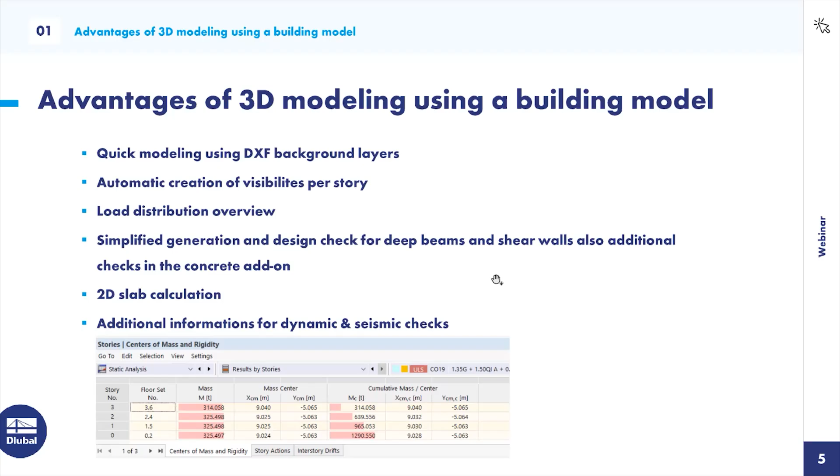Okay, let's switch to the next chapter. Here's a little overview comparing this with positional structural analysis.

The pros of positional structural analysis are, of course, that you can model this very fast and also do the design checks, and you only have two degrees of freedom in this 2D calculation. So you don't have to consider so many effects. It's very simple, and you can check it easily.

The cons are when you design a slab or a story, you calculate this, then you must make a load transfer from the story to the walls, to the columns, and from there again to the slab below. So you must transfer loads again and again until you reach the ground floor, and there you can make failures very easily when you forget some loads. We also have the option to do this with RFEM 6, and I will show you that, but you shouldn't forget something.

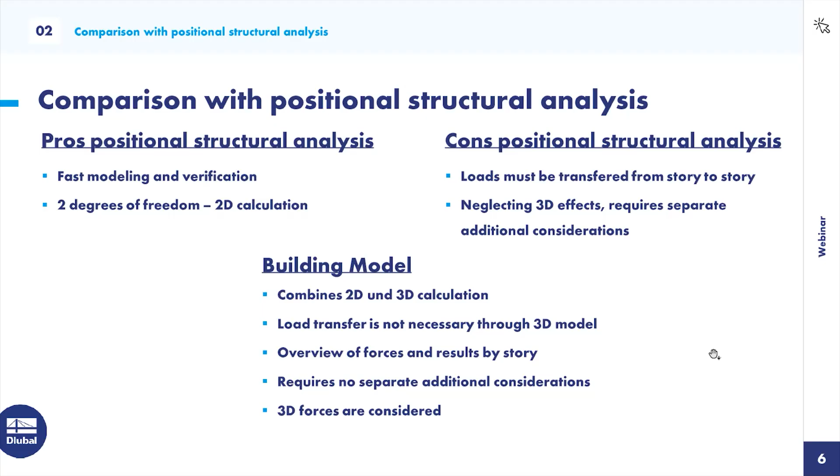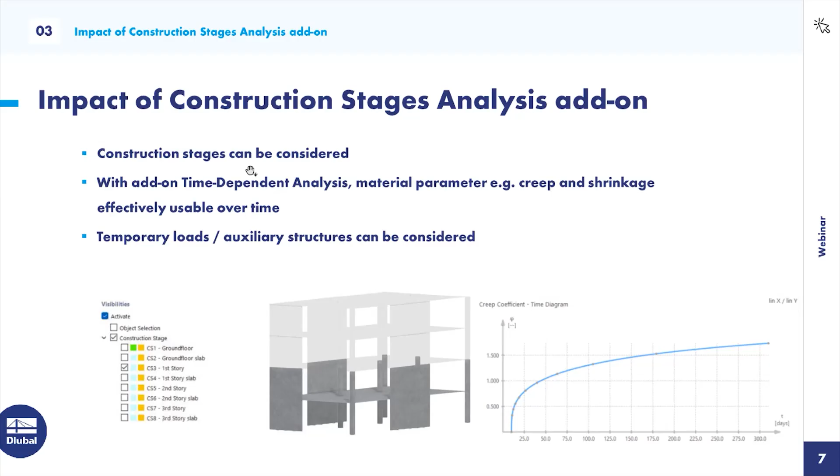Okay, that should be my overview of what I wanted to show you today. Now let's switch to RFEM 6.

Therefore, I will create a new model, and let's call it 'building model,' in 3D type of model, of course. Here are the add-ons we need. At the end, I will show you the construction stage analysis and the time-dependent analysis, but for the first step, I only activate the building model add-on and our concrete design.

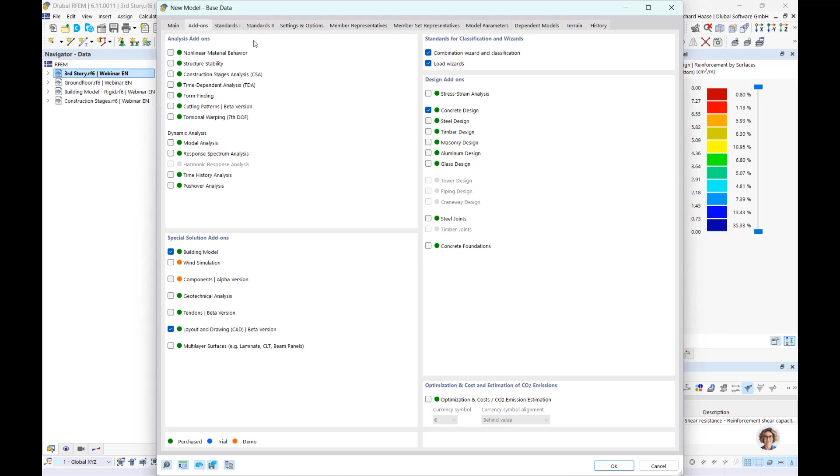Here in the standards, I choose today a German example. So let's choose the national annexes here.

And what I also want to show you is we have load wizards for wind and for snow, and a nice connection we have, I want to show over the model parameters. So if you know, we have our Geo-Zone tool where you can see the forces from seismic, from snow, or from wind, and we have a connection in RFEM 6 directly when you click on this button. In the background, it opens our Geo-Zone tool. Here you see our information about snow, wind, and seismic.

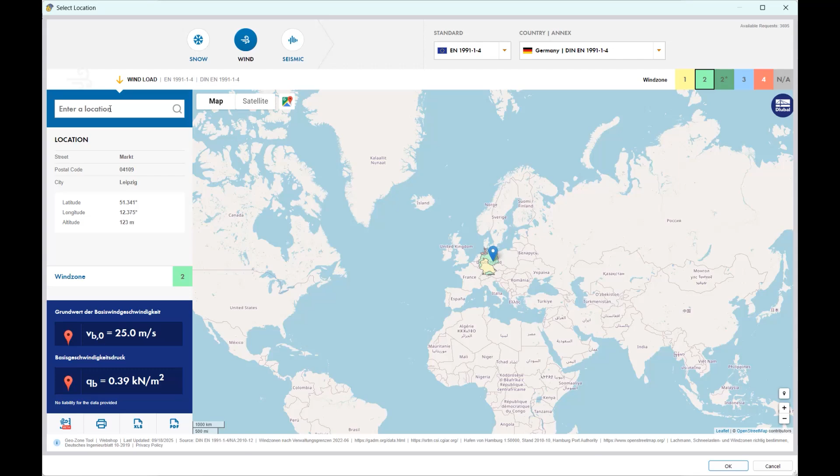So let's take our Dlubal office in Leipzig and say OK. And so we see here the characteristic values of the snow load and also of the wind loads. When we click OK, RFEM 6 imports this information from the Geo-Zone tool. When we now click OK, RFEM has the information, and later when we click the load wizards, RFEM directly has the information, and you don't need to choose the category or the wind zones and so on. I'll show you that later.

Okay, then let's go to the materials. I have chosen concrete C30 and reinforced steel B500.

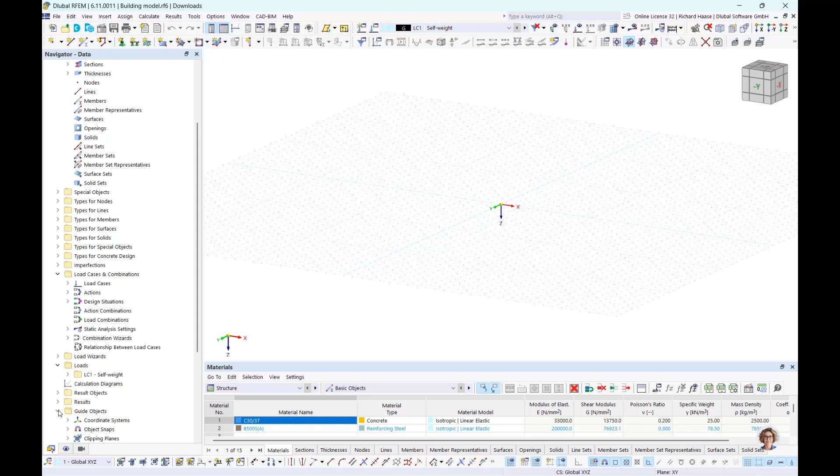And of course, I want to show you the quick modeling. Therefore, we need under the guide objects our background layer. Okay, here we have our background layer.

First let's switch to the building model, and here we can create our building stories. Let's say we want to have a 3-meter height and want to have 3 stories over the ground floor. And we want to choose here our floor type as rigid.

When we choose semi-rigid or rigid floor diaphragms, we have the option to choose here for all nodal and line supports the supporting type, which you can analog to a 2D calculation design. So let's say we want hinge to hinge for the upper floors, and also hinge to hinge here, and in the ground floor we have a rigid hinge and also a rigid hinge.

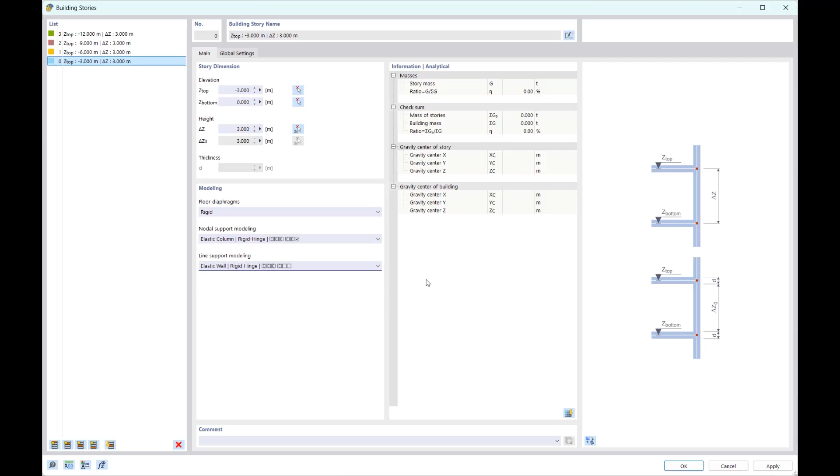Okay, then we have created our stories, and let's begin with the modeling.

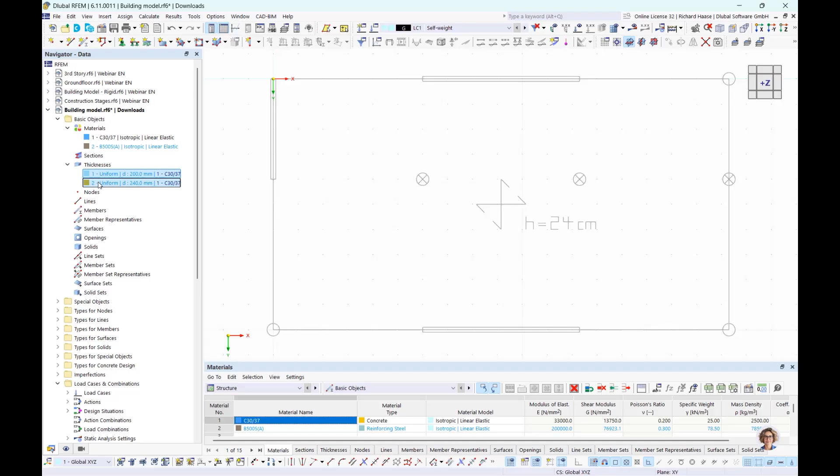First, okay, maybe we delete this and say, okay, I need a new section. And we see here we have circular columns, so I choose this column. Let's say 200 is the default setting. Now we want to measure the information directly from the DXF background layer, and we can say, okay, from here to here, and it switches to 500 millimeter diameter. And say okay.

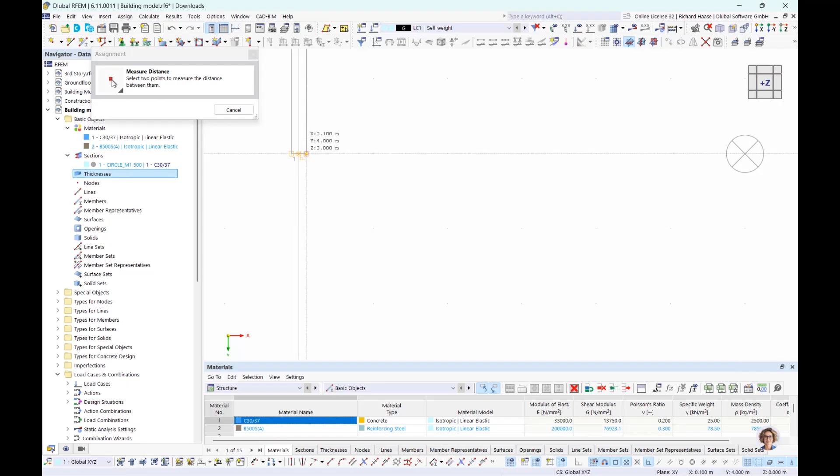Then we also have our walls. Therefore, we do the same, a new thickness, and say okay - the only thing I changed is so you see that it works, 300 millimeter. Let's say it's a default setting, and I measure now the information from the DXF file, and we have our 200 millimeter for our walls, and we need a new thickness.

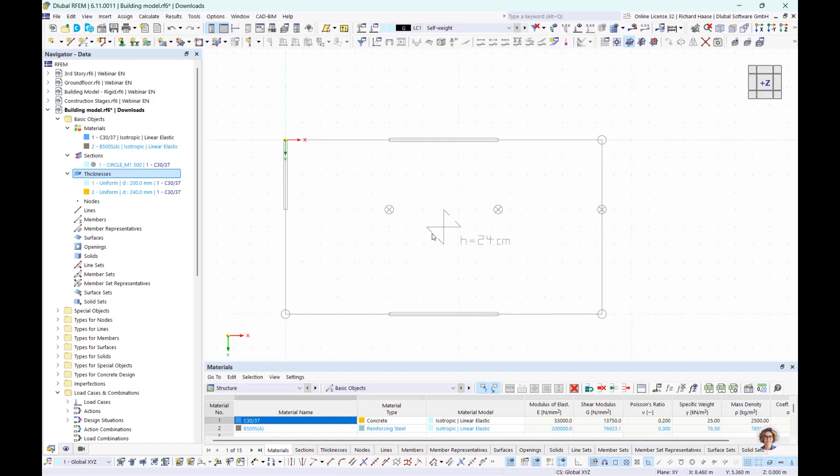And yeah, I'll show you for the slabs, it's 24 centimeters. Of course, you don't read this information off this 2D background layer directly, so I take this information and then it's fine. Okay, then we have created our section and our thicknesses.

Now I want to change the rendering for the input. Therefore, you go to the model, solid model, surfaces, and here we have the option 'filled inclusive thickness'. That's very good for control. You will see what I mean in a few seconds, but let's first start with the columns.

So yeah, this button is really limited to the building model add-on, and this button gives you the option of modeling via the bird's eye view. So let's start with our columns.

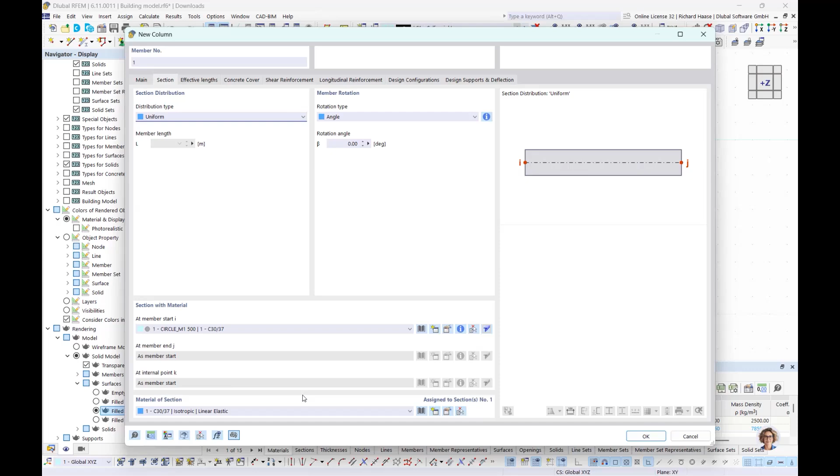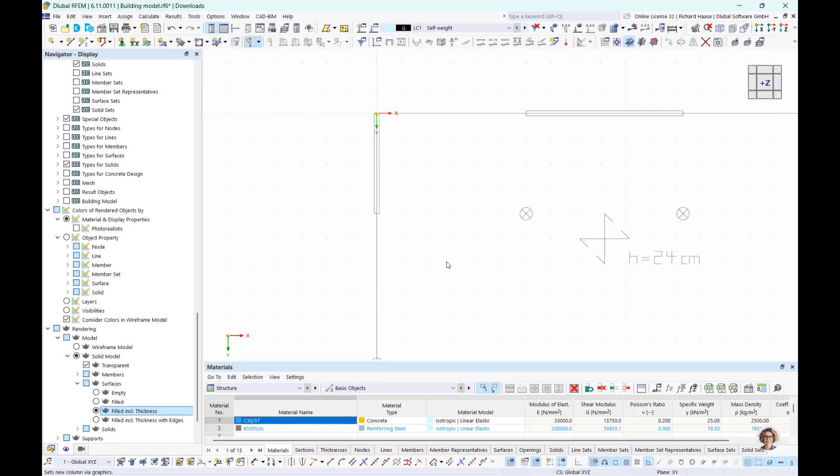Okay, we choose our measured section, and here we can select the building stories, and let's say okay, we have this column in all building stories. Apply - oh, I made a mistake, sorry, I clicked too fast again. Okay, so we have these columns, and go here, and you see directly this big bubble - it's the sum of the masses per story. So when we click here to another point for the columns, you see it's growing and moving more toward the middle. Let's do this for the others too. And our columns are ready.

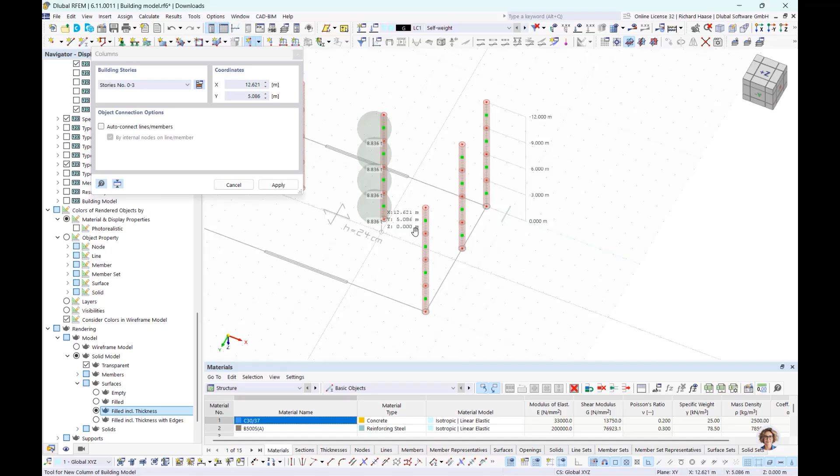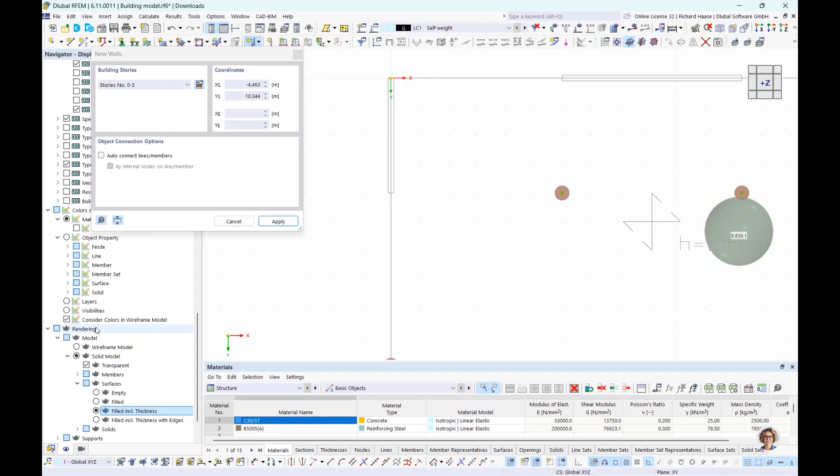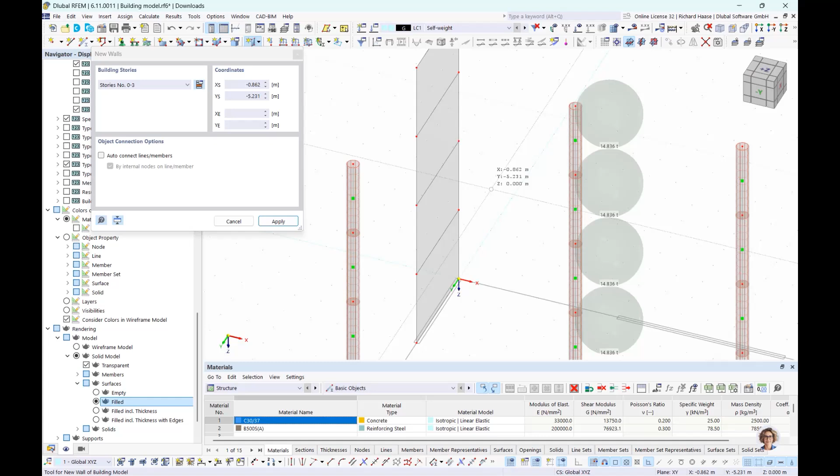So now the same for our walls, our 20 centimeter. Maybe we switch back to the bird's eye view, and wall 20 centimeter. Now you see here our rendering option - there you have a direct control option to check if the thickness fits the background layer, and you see, okay, it fits. The default setting is only filled, so you get this 2D visualization, but here we have the real thickness, and I prefer this for controlling. Okay, let's continue with the other walls and our last walls here.

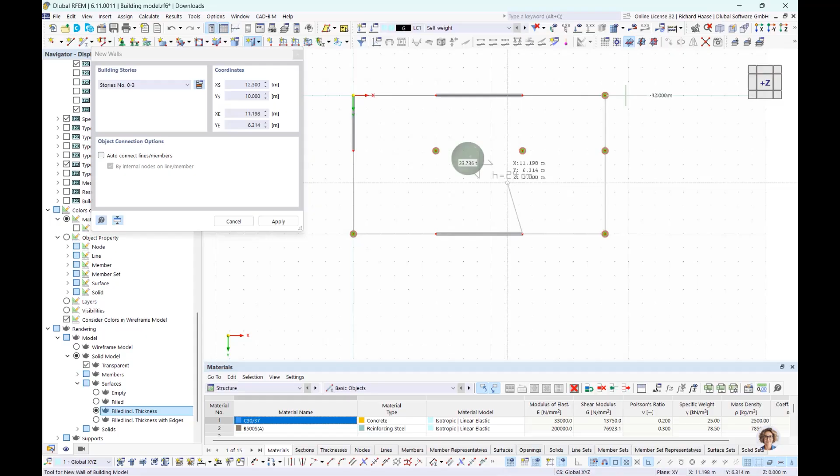Okay, so one thing is missing - that's the slabs. Let's choose here the rectangular floor. Therefore, we need the other thickness, 24 centimeter, and of course, all stories is activated.

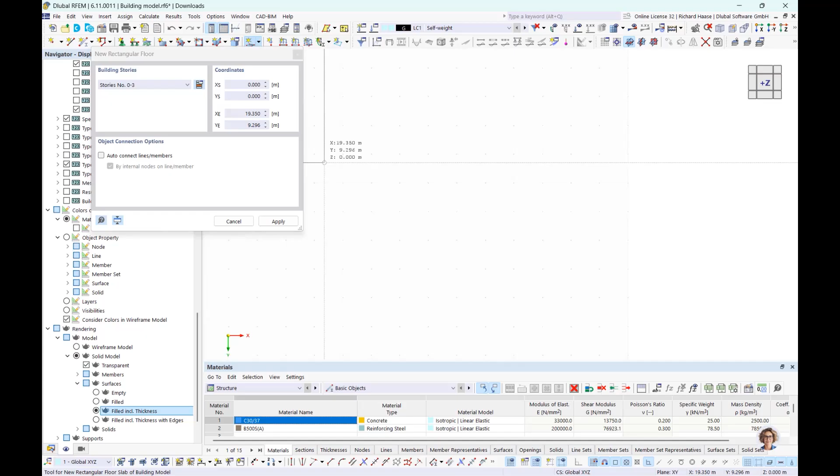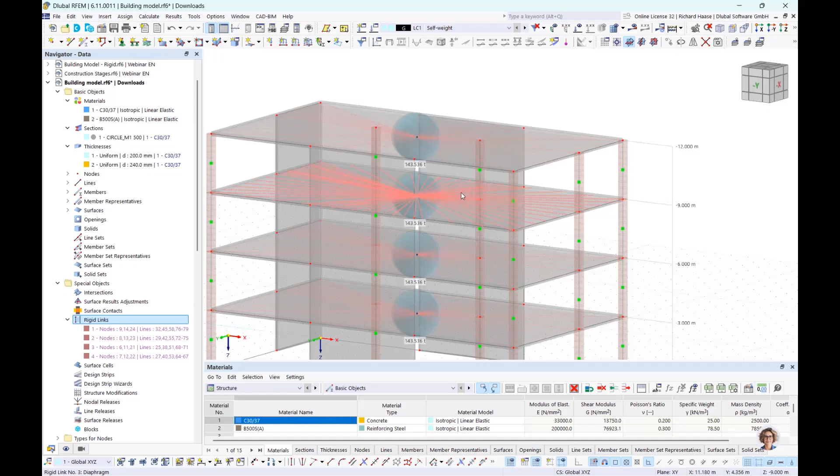Now we see here these red lines. It's the special thing of our slab type rigid, because for this rigid slabs, there is a moment. We have here also special objects, rigid links, and this rigid links connect the edges of every slab to the center of mass per story. So this is a good point for dynamic analysis, because it simplifies the masses to one point, and it's then more clear for dynamic and seismic analysis, and this reduces also the calculation time and the eigenvalues. This is a really nice feature for dynamic analysis.

Okay, so we can also deactivate it here. One moment, it's, yeah, special objects.

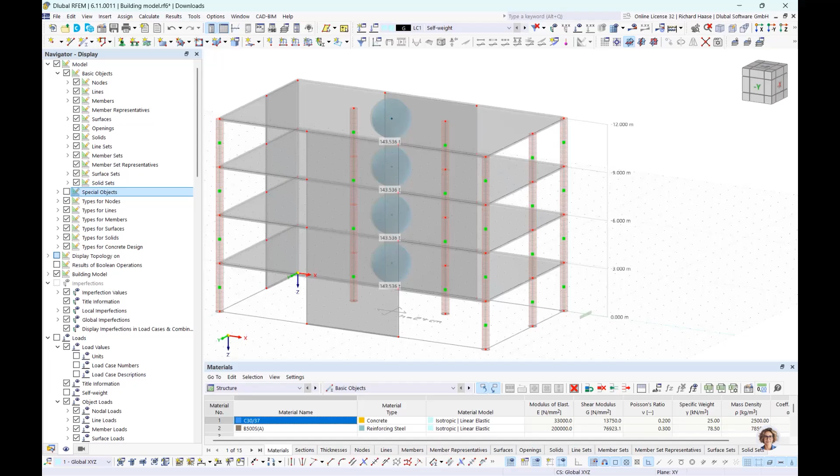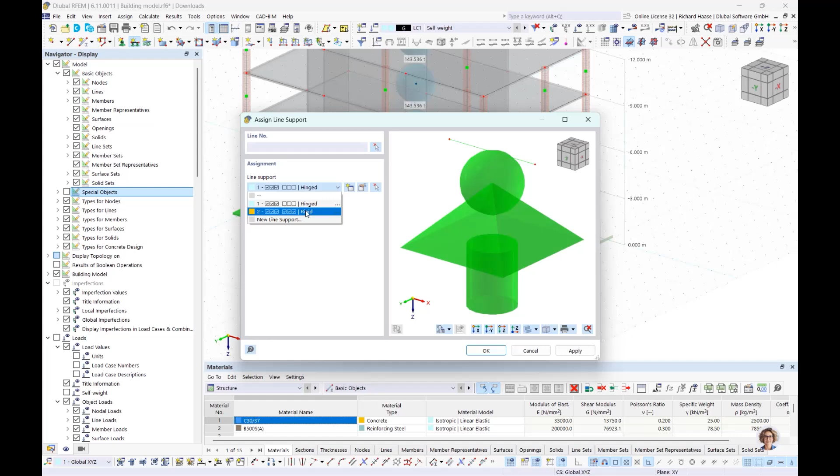And now let's continue with the supports. We have here our fixed nodal supports. And also the line supports, let's say it's also hinged. Choose here, here, and here.

Okay, then let's go to the loads. Therefore, we must create some load cases. Let's say here self-weight, dead loads. And here we need some live loads. And the snow and wind load cases I will show you through the load wizards.

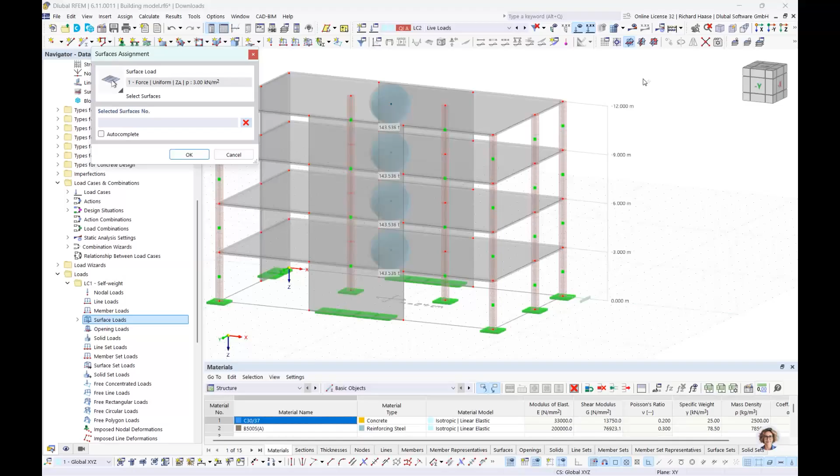So let's say firstly okay here, and go now to the load cases and create some surface loads. Really simplified, but it should fit. Let's say we have here 2 kilonewton per square meter, and we can say apply and next. So, switch to our live load case, and here we want to have 3 kilonewton per square meter. Okay, let's finish this.

So we also have the option to control this very fast, but it looks good. So then let's switch to the load wizards. We have here the option to activate such load wizard.

Relatively new, let's say we have also load wizards for the moving loads. Here are our support reactions. I will show you that later, what you can do when you have 2D structural analysis, and so you can, with this command, copy and transfer the loads from story to story, or what I described before.

Okay, but let's go to the snow loads first. We want to create a new load wizard for snow. We must first pick the roof corner nodes, and let's see, here, and here, and we have a flat roof type.

Go now to the parameters, and now we see what we do in the beginning. The definition type is changed to map and parameters, for this German location, and you see here it's automatically seen which load zone, which height, and the characteristic snow loads and other coefficients. So this is simplified, and it's easy to switch here.

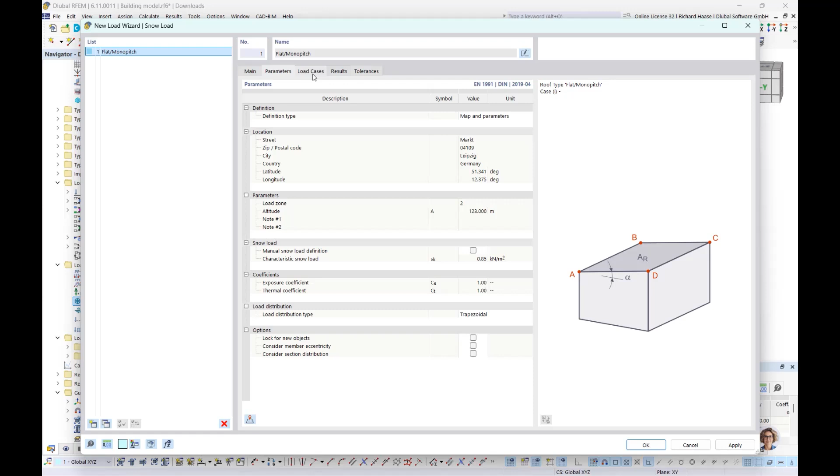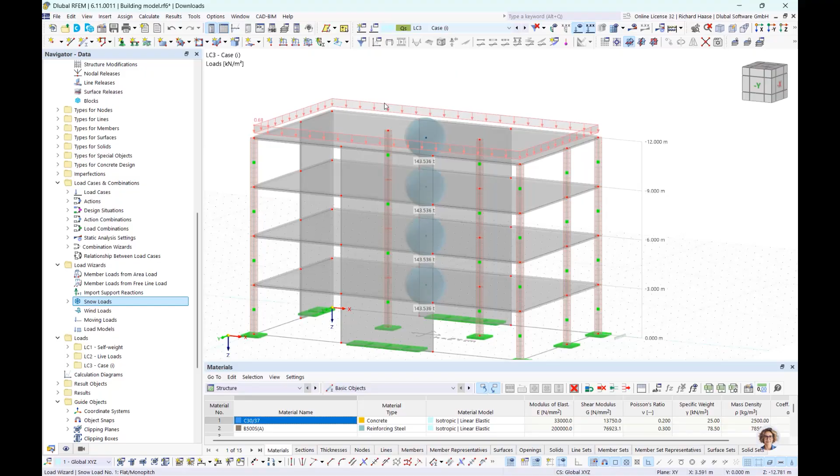Okay, then to the load cases. So you see here, okay, I would create a snow case here for you, and you only must click this button, generate load case, and say okay. And very fast, we have now our load case here with our snow loads, and the same works for the wind loads.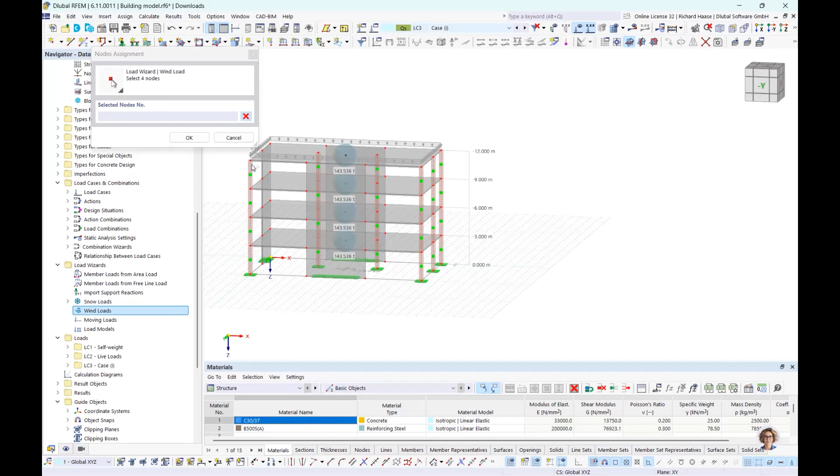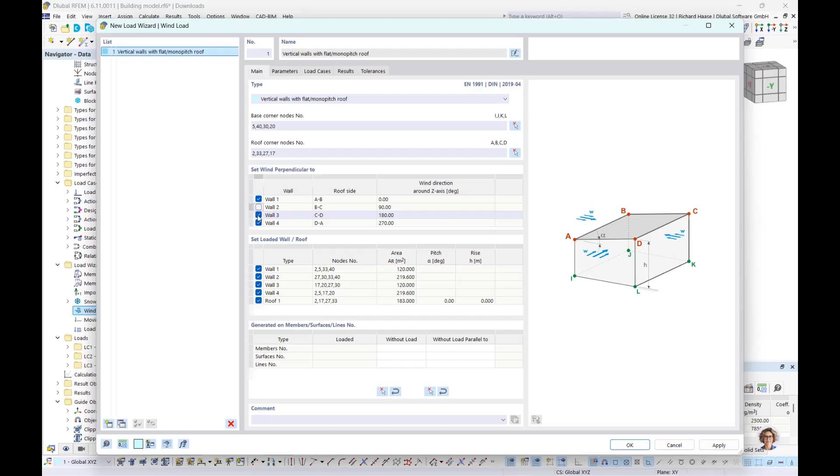Here we must, okay, that's the base corner. And here. Okay, the same for the roof corners, for the wind. So then you see on this picture, we have here our 4 wind directions, and let's say we limited this to wall 1 and 4. And okay, the parameters here is the same.

You see our location, the terrain category, altitudes and heights, and load zone. It's automatically transferred from our map. And so we have here again this option to generate automatically our load cases. And we have here 2 cases per direction, and say okay, okay, and we can prove it, of course.

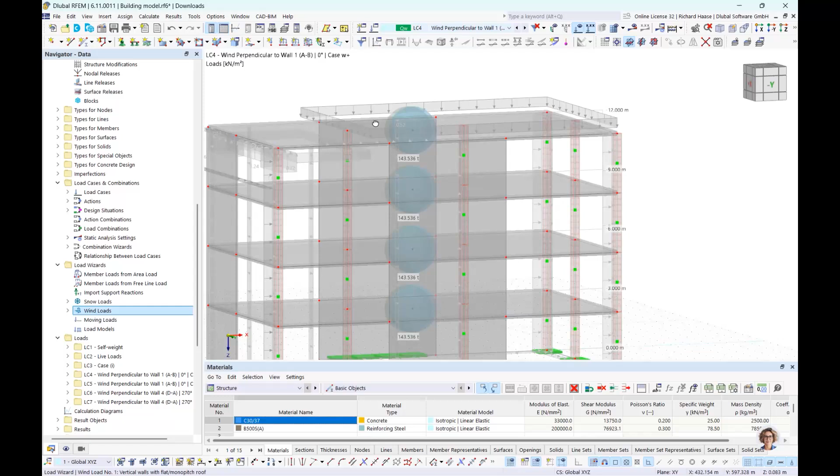So we see here our wind loads, here special this load area for the slab, and the same works here for the other wind case.

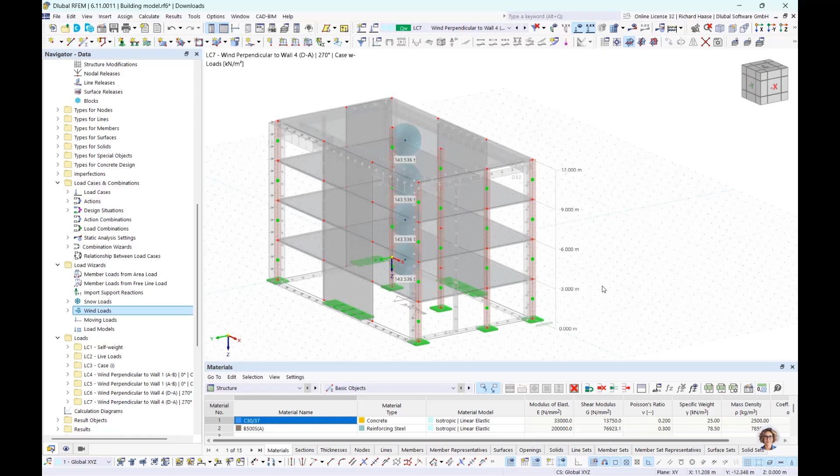Okay, so our loads are finished, and I don't want to waste time with calculation, and would switch now to a calculated model, our building model.

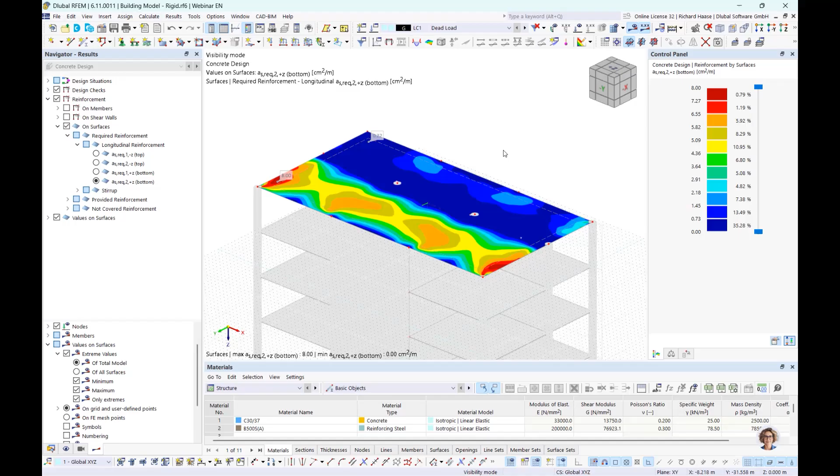Here we have results, and let's go to the dead loads and switch to the static analysis. So, oh, I don't have calculated. Okay, and here we see the first thing which is activated when you have chosen the rigid or the semi-rigid floor type, that it is calculated 3 times, and that's because we have now here an additional option in the static analysis of building stories.

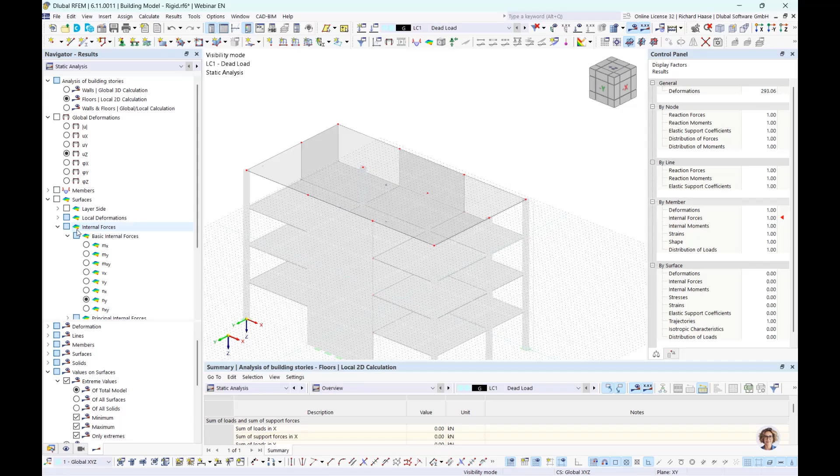So you can have a look only on the floors, on slabs, and I want to show the internal forces, the moments.

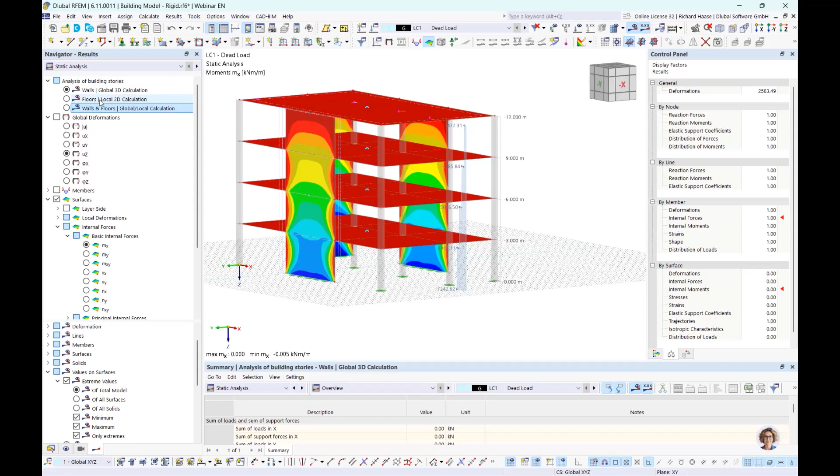Switch back to all, and now you see here really only the results per story per slab. When we switch to the 3D walls calculation, we have additional walls, and because these walls are connected via the slabs, internal forces can also be in the slabs. And this last option, walls and floors, is the sum of these two.

And here we have our combined results. But what I want to show you before is our load distribution for the case of the dead load. Oh, and I forgot here our visibilities, which are automatically generated.

Now we have the option - normally you must define this by yourself - but the building model add-on created this automatically per story, so you can easily switch and have really every story a fast generated view for that.

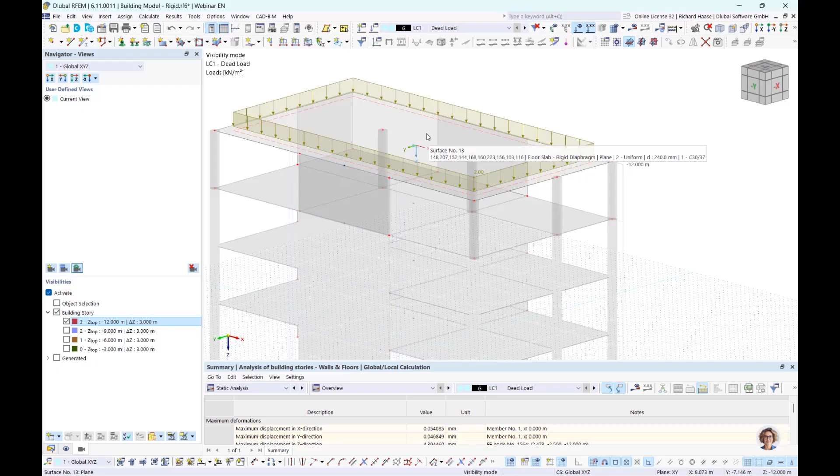Let's go to the third floor, and here we have our surface load, and now we have the option to see how the load distribution looks. Therefore we right click on the surface and have this button, loads from load distribution surface, and now you see how the surface load is distributed to the walls and the columns.

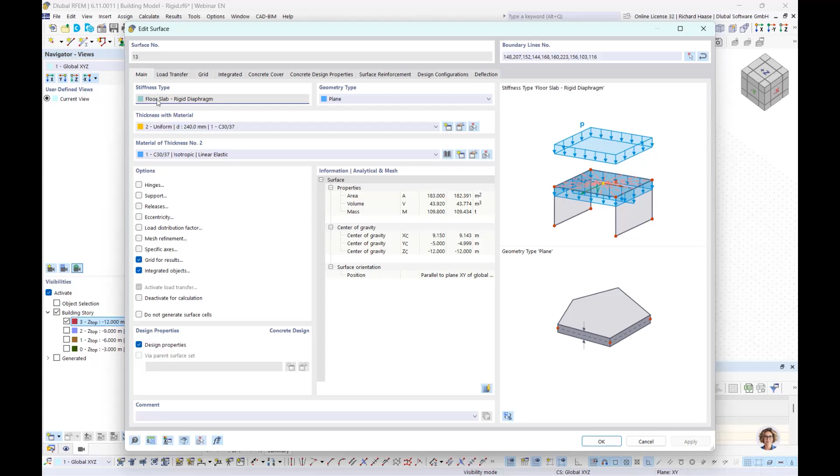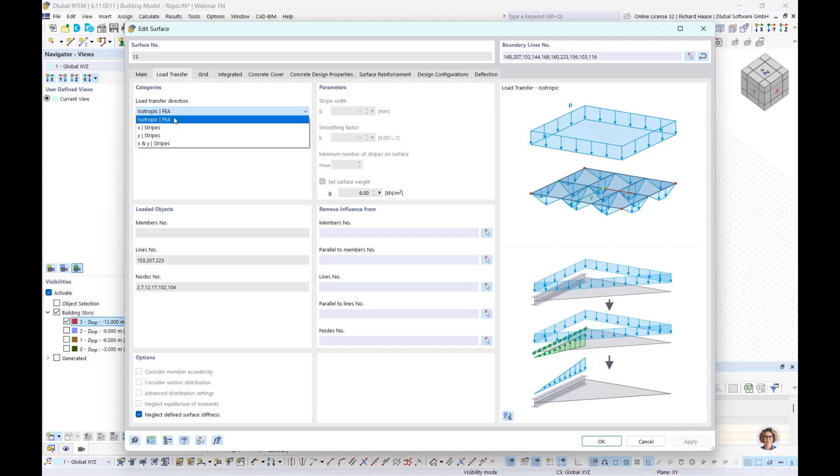And when you double click on the slab, you see here our stiffness type, floor slab rigid, and we also have a load transfer menu. Default setting is the FEA type, but you can also say it should only be in the local axis X or Y stripes, or X and Y stripes, if you want to do it that way.

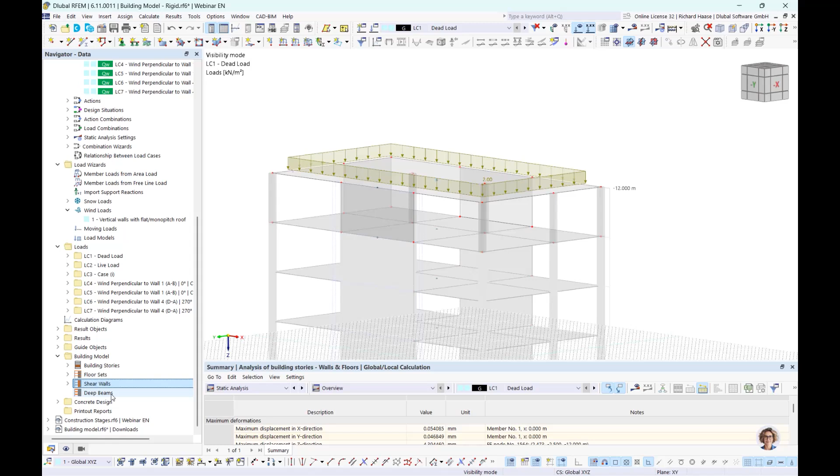Okay, but let's switch back. Another thing I also mentioned in my presentation before is that in the building model we have the building stories, and now we have also the option to define shear walls and deep beams. For the shear walls, I did it here before - when we click here, we have this one wall, and it is easy to define.

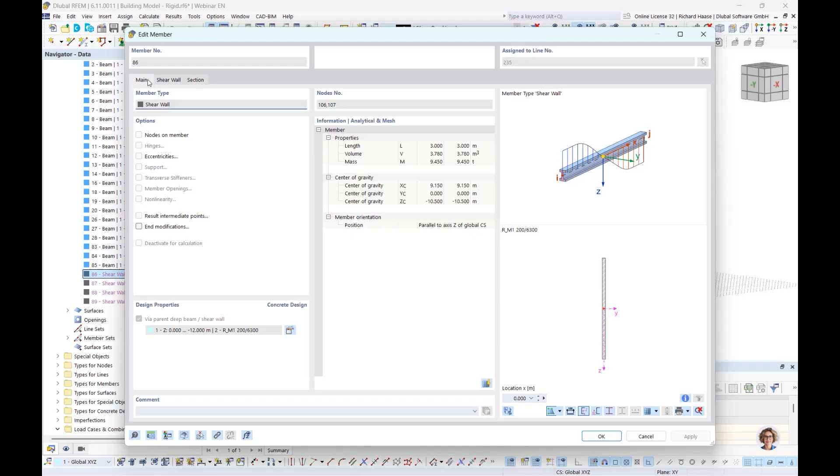You only must select surfaces or surface cells, or even a member is also possible. And in the background we can see here we have our columns, and this purple - the shear walls - is what is generated in the background. You can see also here it's a result beam, let's say, which integrates automatically the surfaces or surface cells or members which are chosen before.

And finally here our member sets. So you see, you can also do this in a manual way, but the building model add-on simplifies the steps.

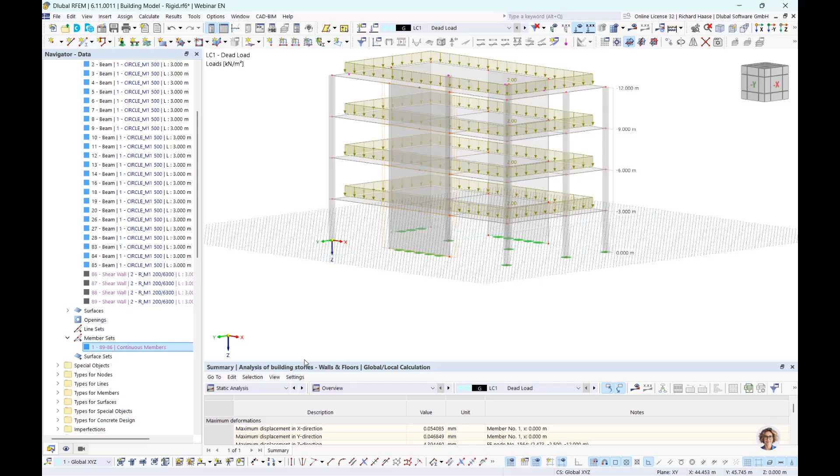Another good point is when we switch or go to the static analysis, we have here a new chapter, results by stories, and can really see which results come from which story - story actions, horizontal forces, for example, or interstory drift or deformation.

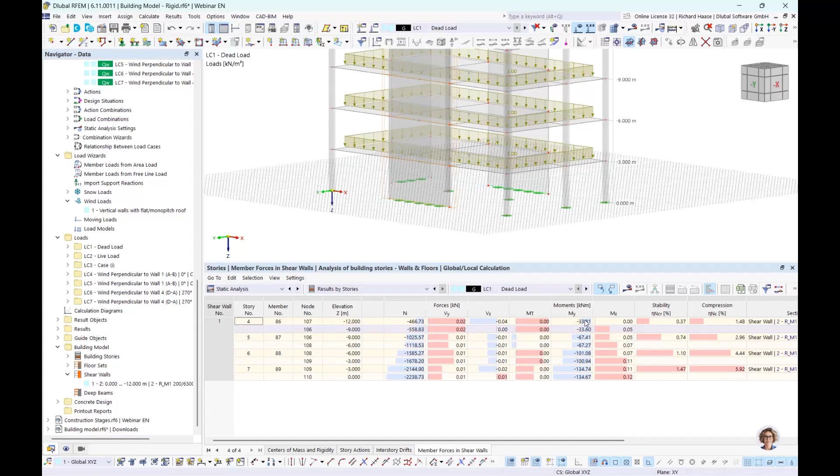And also, because we defined our shear wall here, we have a new chapter, member forces in shear walls. So you also see here the axial forces, the shear forces, moments, separated for every story. And that's a feature which only the building model can provide.

Of course, you can create it via a result beam, but this results-by-stories view you would not have without the building model add-on.

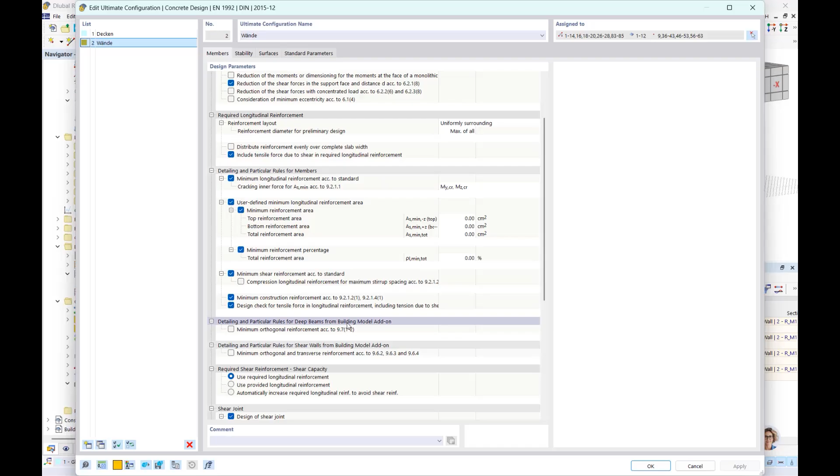Okay, then maybe let's switch also to the concrete design, to the configurations. Because these walls and deep beam shear walls and deep beams are result beams, we have under the concrete configurations, in the chapter members, really special additional checks which are only possible when you use the building model add-on.

And also for a better overview in the concrete design, when we check here, we have additional design ratios or reinforcement calculations for shear walls and deep beams. So again, when you don't use the building model, all these ratios would be found on the members, but here you have an extra chapter for that. It simplifies the work and gives a better overview of the results.

Okay, then let's compare to the traditional way to analyze slabs. We want to have a look at the third story, and I will show you that we have really exactly the same results.

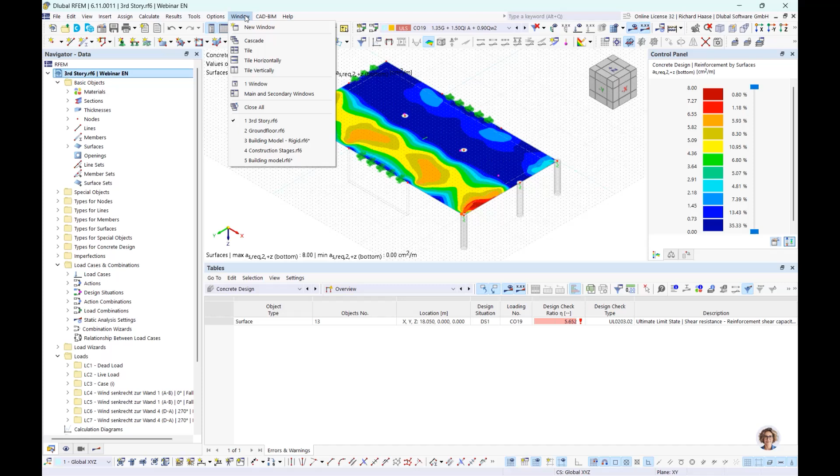And therefore I want to create the windows next to each other... and when that's not the... was also wrong. Okay, now we have selected our both. I want to show you again the window.

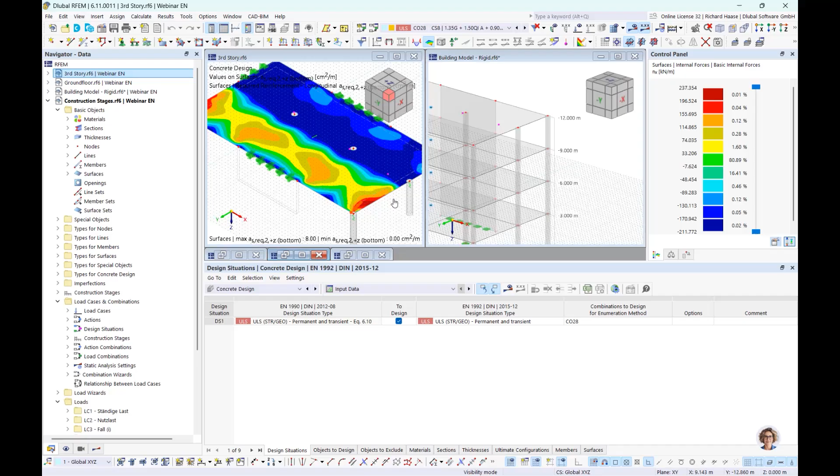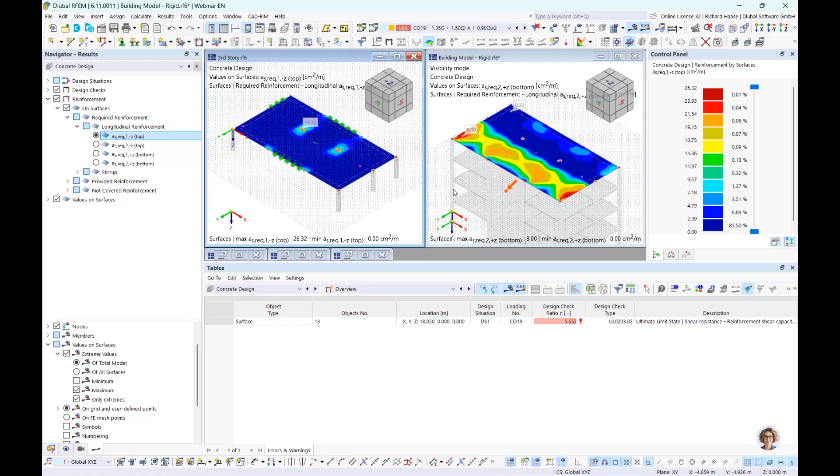Select only the third floor. Okay, now you see the 2D model, choosing also here the type of model, 2D plate, and let's compare here the required reinforcement. With our building model, you see we have exactly the same results.

And here, let's do it again. Okay, and the last one. So you see it's possible, with the building model, to have a traditional structure analysis calculation of 2D, but integrated in a 3D model. And you get the same results here. That was what I wanted to show you.

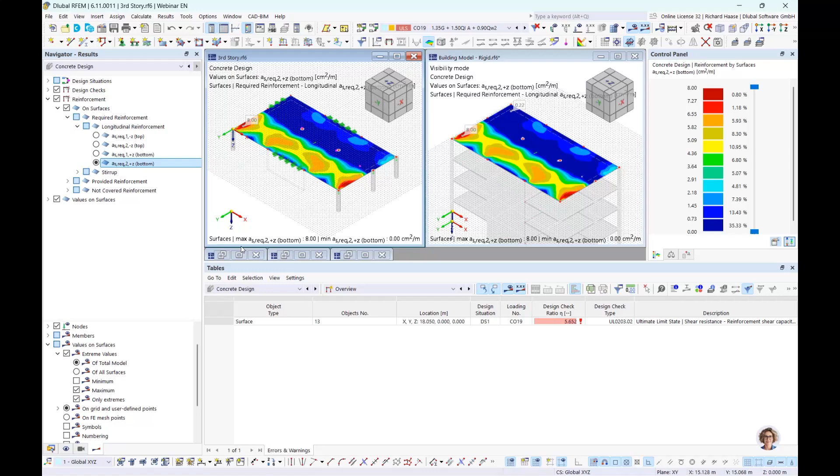So maybe we go, I hope this was the right model, to the ground floor, because I also want to show you the option with the load transfer, and show you that it works the same way with the 3D model.

So I have created every story, an extra model for every story. And here my last step was to load transfer the forces from the first story to my ground floor slab. And here you see this connected model.

The thing is, to make it work, you must create in our Dlubal Center connection that all models are in the same folder, and then you have the option to connect these models. When we switch to the object chapter, you're also free to use it manually. There you can say, okay, for example, I only want to transfer from only single nodal supports or single line supports to this and this node or line.

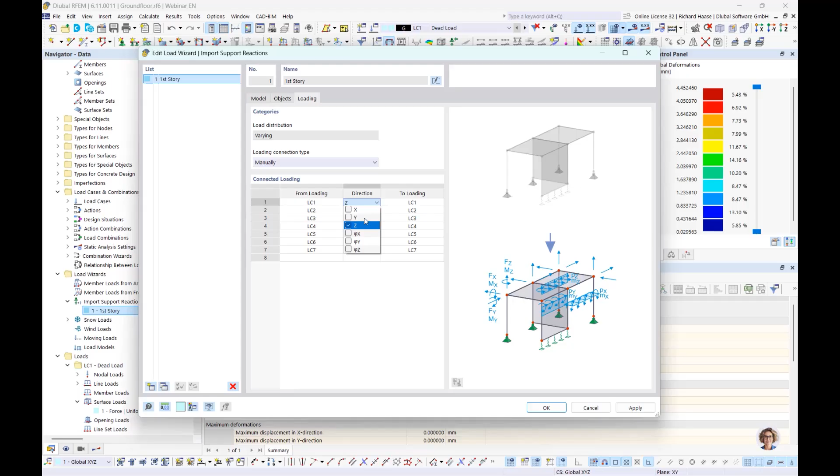Then, for the loading, you also have the option here to say, okay, I want to choose it manually. So you can transfer from load cases or also from load combinations to our actual load case or load combination, and can choose here also the type of forces which should be transferred.

So I only choose here the Z direction, and only for comparison of the dead load, you see here again in this purple color the loads which come from the first floor slab, and can control it here, also the forces, and this models are also connected.

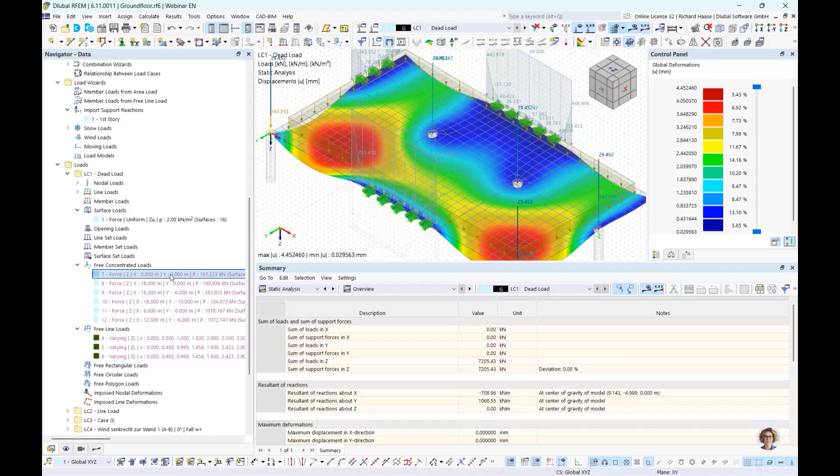For example, when I change something in the second floor, these load transfers are connected with each other because they are in the Dlubal Center folders, and then it's an automatic recognition that this change also results elsewhere. And if you don't want this, you can also say, okay, that's finally good enough, and separate here the connection, and then it's fixed.

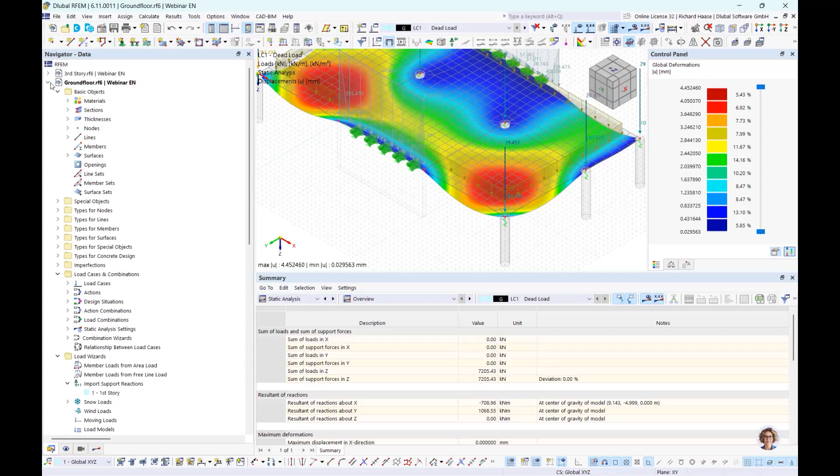Okay, but the thing I want to show you are the sum of loads, and we have here our 7.2 meganewton, and when we switch back to the building model, so 7.2, dead load result by stories.

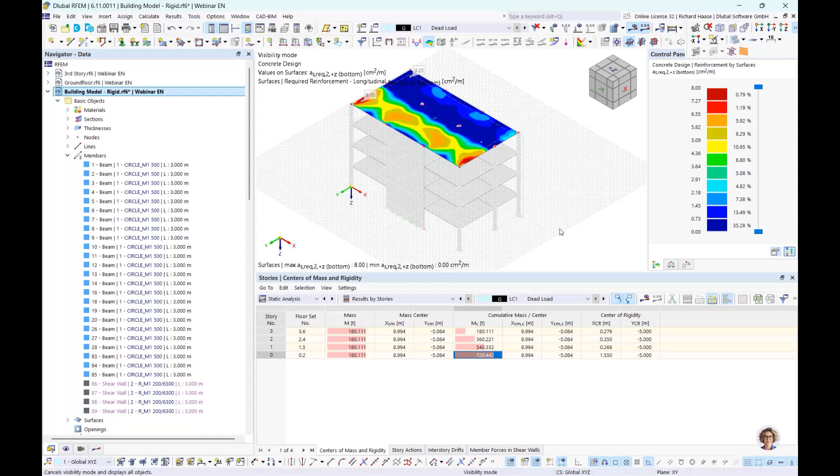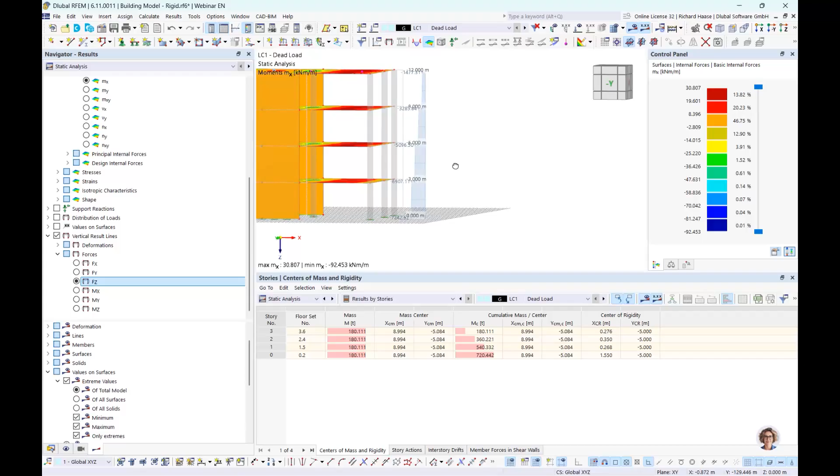We have also here 720 here in ton, but we also can do this when we cancel this over the static analysis. Here we have vertical result lines, also a feature only from the building model. You can say forces and FZ, and you see also here the forces per story, and finally also here our 7.2 meganewton.

So the masses are identical when I choose it in 2D and 3D. Okay, then let's maybe deactivate it again, to the story actions.

So I mentioned also that it has pros when you use dynamic analysis or seismic analysis. So you have here, okay, for dead load it's a little small, but the forces in global X and Y, these forces you can compare, for example, for the seismic forces, and think about it if the seismic forces are governing.

And also with the interstory drifts you can do serviceability checks and say, okay, this deformation per story is too high, or it's okay. And also, but I don't want to blow up this model.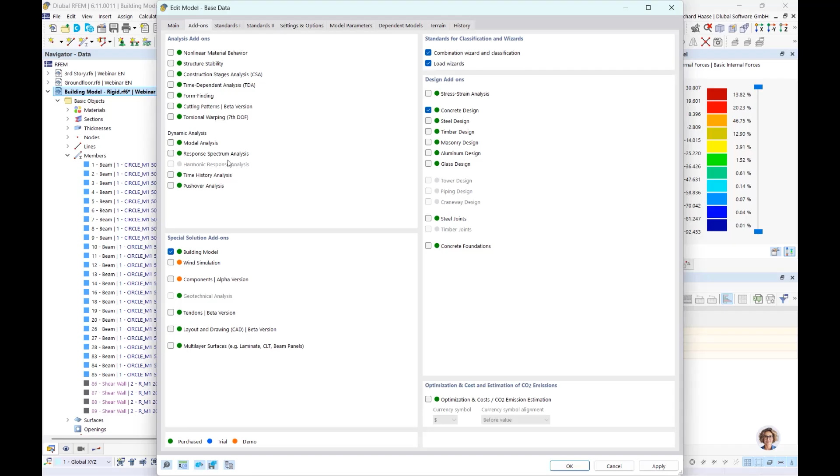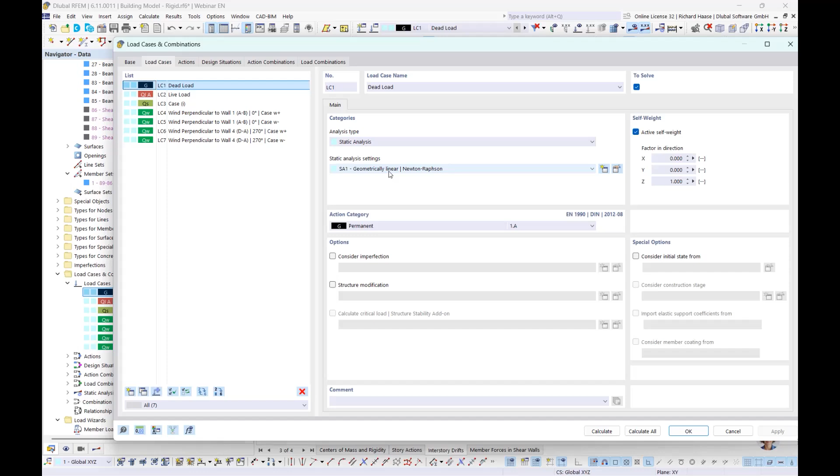We get also, but I only want to say to you, when you would have activated this response spectrum analysis, you would also have this result by stories chapter for the response spectrum, and there is also a value which shows you, okay, is it allowed to calculate to theory of first order, or you must switch to second order. So first order is geometrically linear, or the second order theory.

Okay, and about the rigid links, I told you before that it has a good effect for the seismic.

Okay, we also have two additional story types. I want to say something about it too. Here are rigid and semi-rigid. Then we have also without stiffness, and that's really only a slab without stiffness, which is only for load transfer, and in some cases this could be usable.

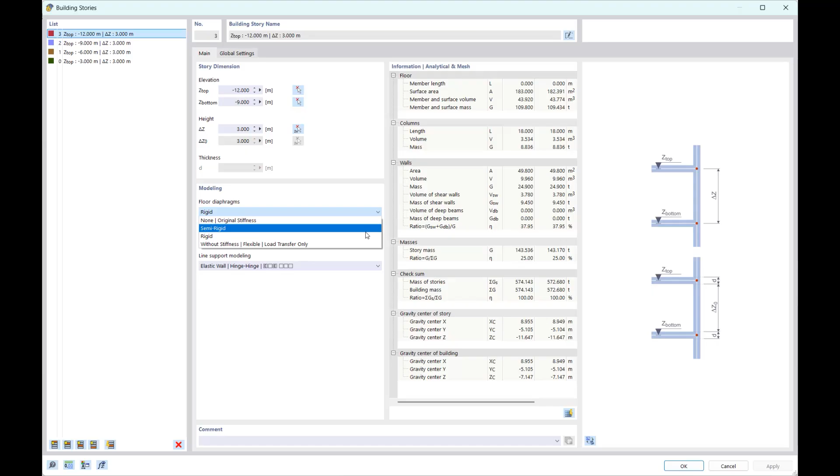We also have this None | Original Stiffness, and when I choose this, I don't have these 2D and 3D calculation types. This is like when I model a normal 3D model, so I must create the hinges and conditions manually. But what I have when I choose this is also additional information and result types, result by stories, and this is usable for every type.

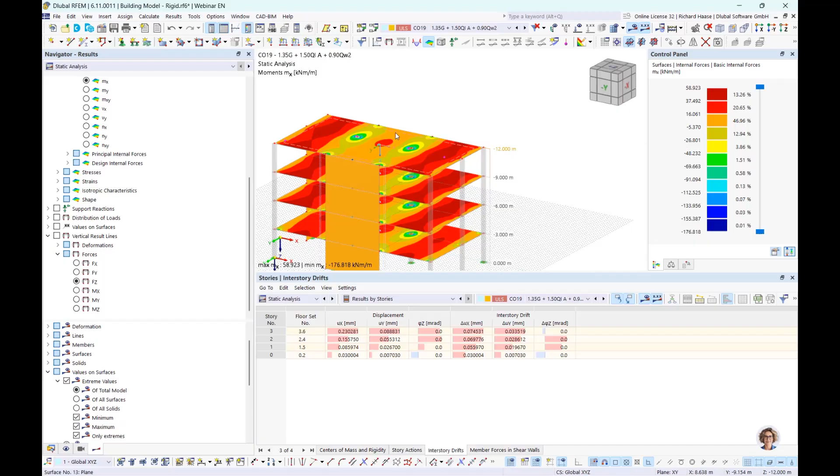So then let's have a look at one combination. I choose number 19 and compare here something. Let's go first to the third story. And of course, when I have a 2D model, we don't have axial forces in the slab, because we have this 2D model.

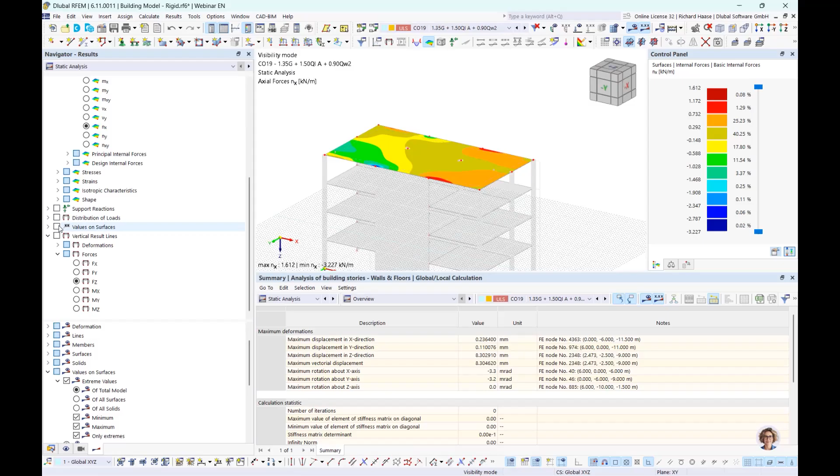And when we switch now to the building model 19, we see values on surfaces, and we want to see all about extreme values. We see, okay, we have nearly zero normal forces, so it's very close to the 2D calculation.

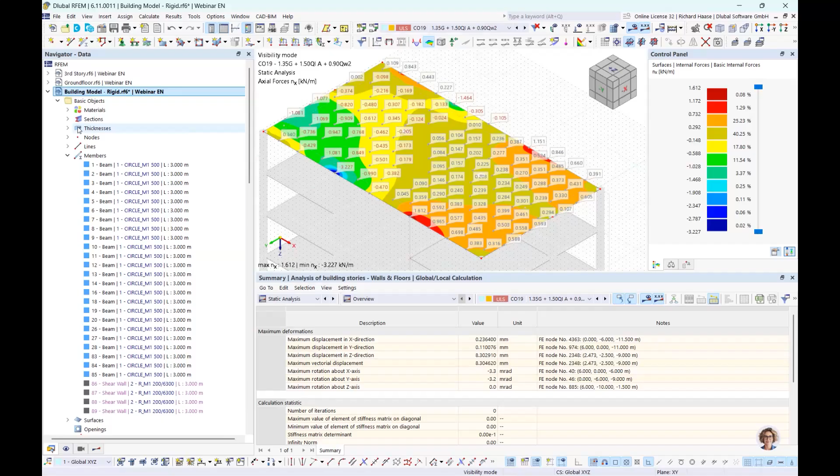Now I want to open a model with the construction stages, like I showed you at the beginning. When I really consider the stages, and we go to this third slab, you see, okay, we also have here some axial forces in the slab, so this could have influence on the results.

So just so you know why there is a difference between this 2D and 3D model - it could be because of these axial forces in the slab. Okay, but that should be with the building model. Now I'm in my construction stages model.

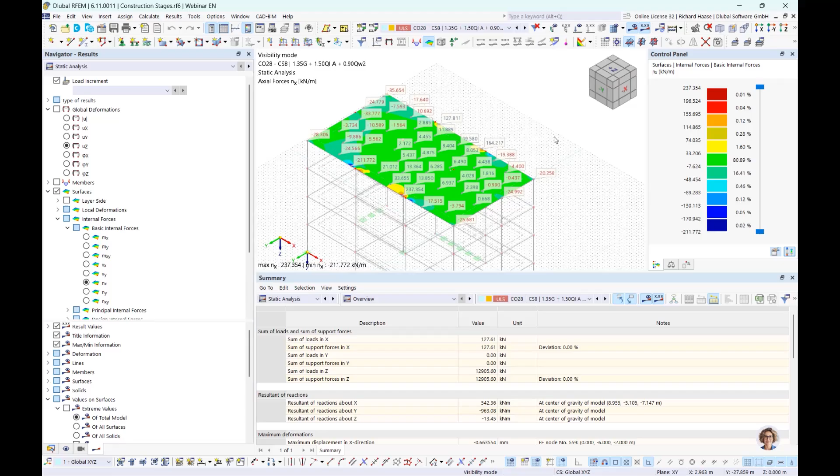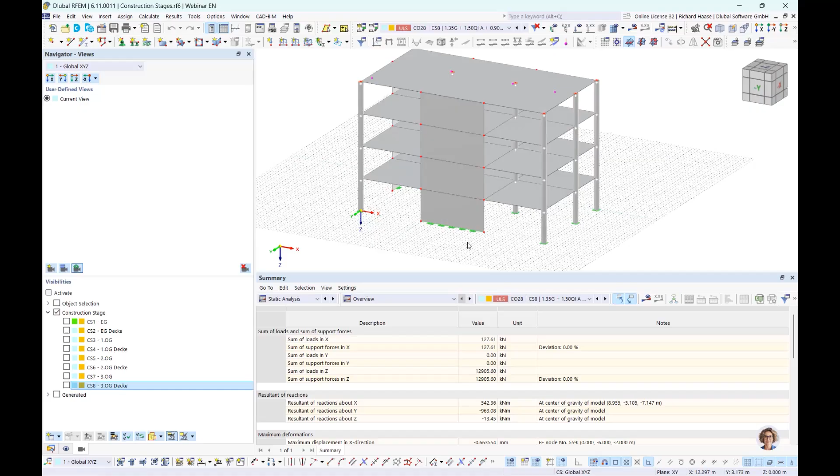I want to show you here shortly some things about it. With the construction stage, we also have an automatic visibility, so we can see which construction stages I define here. I forgot to rename it, so it's the ground floor. Then in the second step, the slab is added. Then the next floor, and so on.

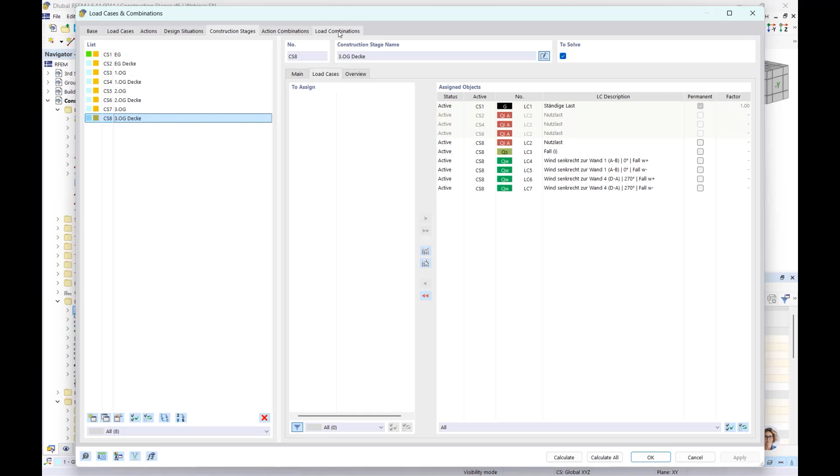So, and these construction stages we also consider for the load cases. I have here an additional construction stage menu, and there we can say, okay, at first we only have permanent loads, and so I can switch the load cases for every construction stage, or even delete them. For example, our snow and wind should really only be there in the last construction stage. And these construction stages are also considered in the generating of the load combinations.

So you see here, these CS2 are the construction stages. And so you really have calculations for every construction stage. And that's the most realistic calculation which is possible, I would say.

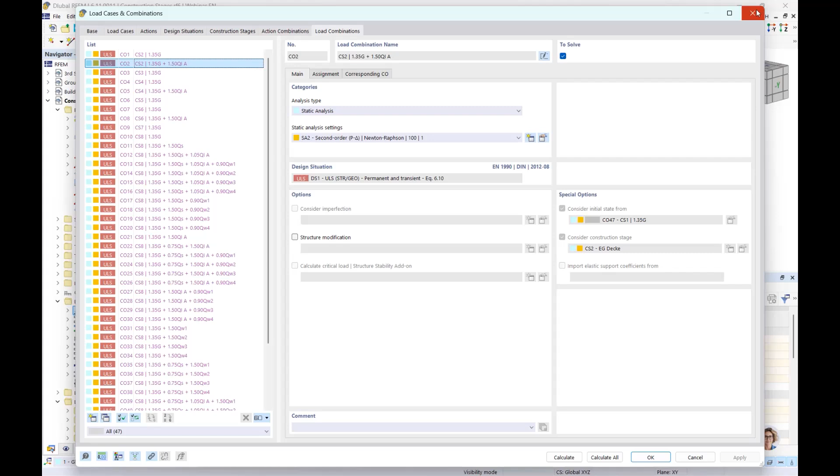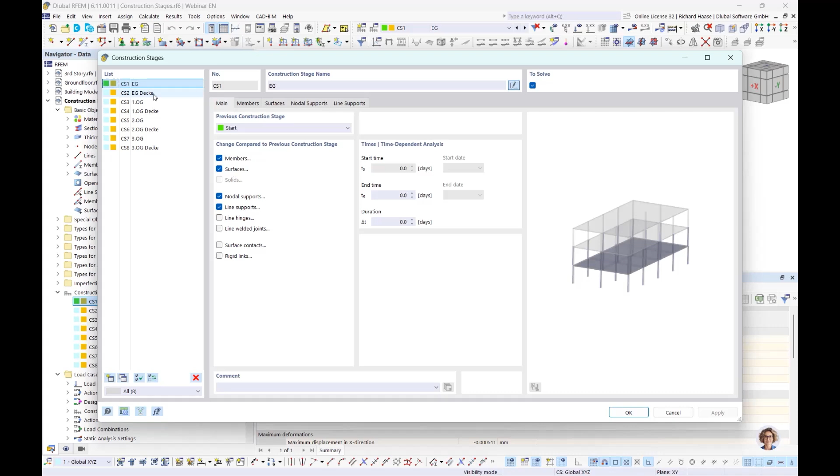I also want to tell you about the time-dependent analysis and the creep and shrinkage effects. Therefore you must activate this time-dependent analysis, and in the construction stages we can then define the duration, start and end time again for every construction stage. So this material parameter, for example for the concrete, can be considered over time. And I find it's a very nice feature.

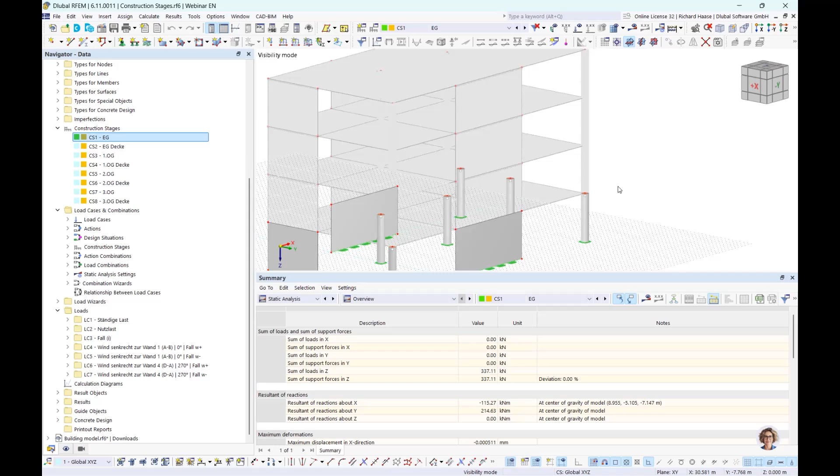Okay, that should be it for my webinar. I hope I could give you some new information. If you have questions, please write us an email, and we will answer them. I hope you enjoyed this webinar, and I want to say thank you from my side. See you, and I would give back to my colleague Andreas.